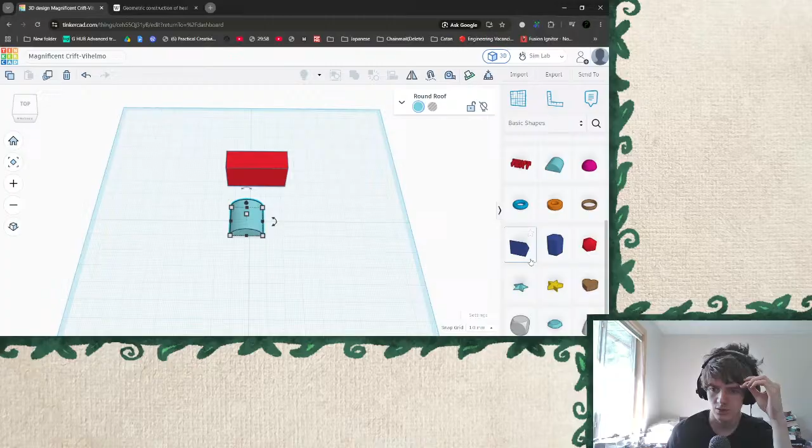Oh yeah, that's a cylinder, obviously. Okay. I want to center it there, which I think is a thing that you can do if I select both of them and then align. Not quite. Nope, nope.

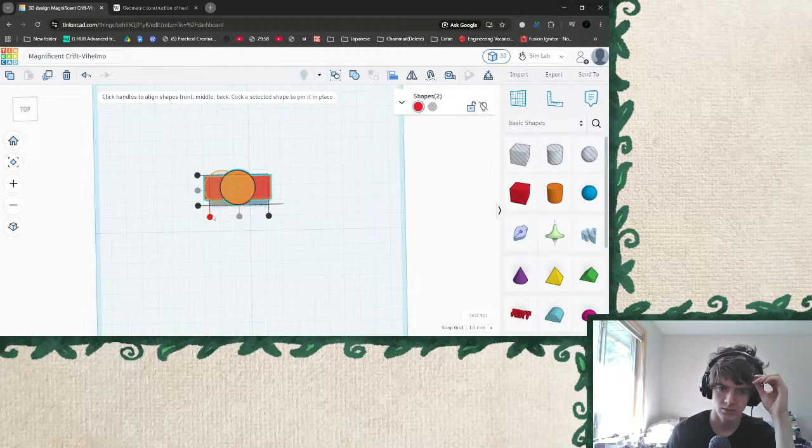Nope, okay, I want like, you know what I could do if I delete that? If I take this one and rotate it this way by 90 degrees, and then this way by 90 degrees. That's caps lock, there we go.

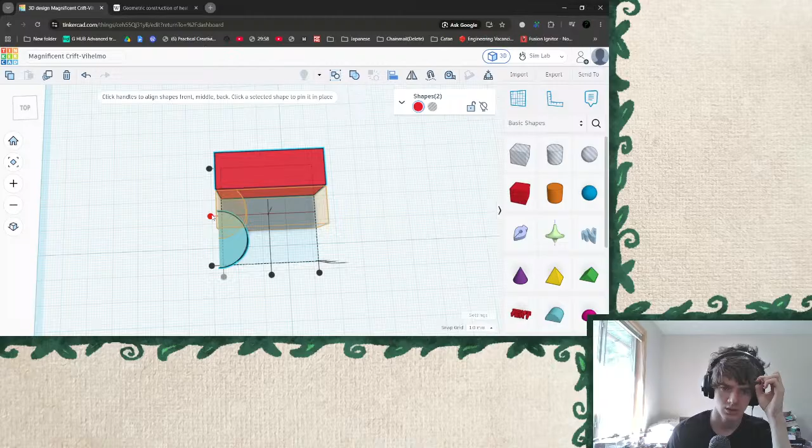Okay, now I should be able to at least left... oh no, that's mirroring. Should be able to at least left align them. And that's accurate. I'd kind of like this to be split in half again, though, so that I can corner... that works.

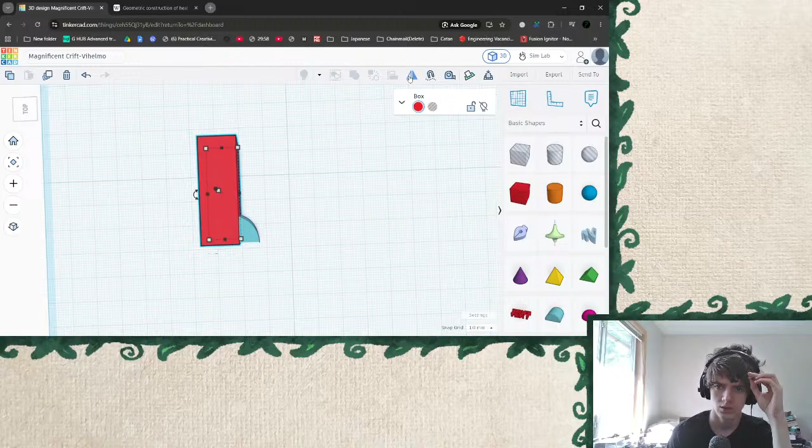Kinda. How wide is this? This is... where do I get the deets? Fit view to selected, home view, mirror, cruise, I don't know what that means, measure. How far from there to there? 13. Okay, so I want the U to be 16.

Did I math that right? I don't know, right now it's 20. Oh well, you know, that'd do it too. Shift to, there we go. So 32, maybe.

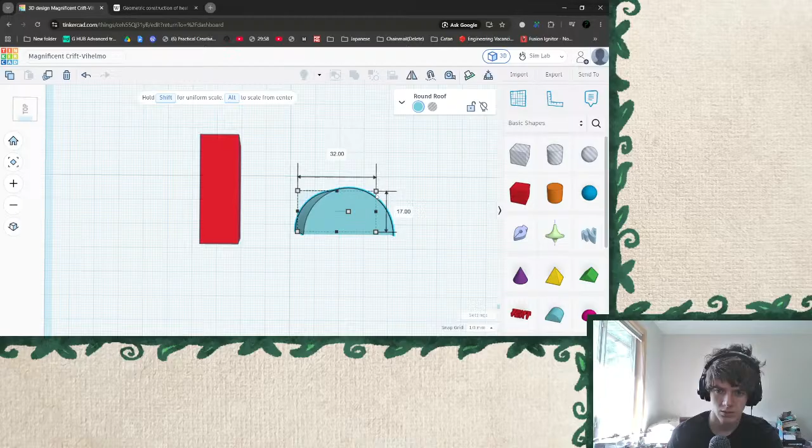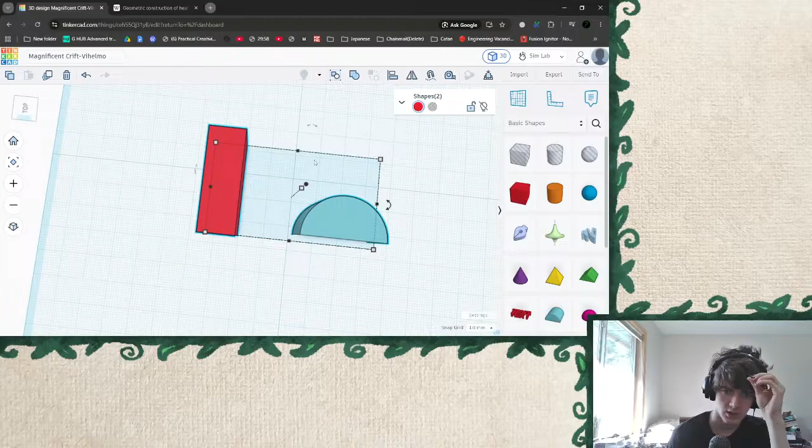Okay, no clue if that worked, it's gonna be jank but it'll be fine. How tall are we looking for? 20. So, 20, nice. Okay, now theoretically, if I select both of them and I align, that's mirror, I align to the bottom and then to the left.

That's not right. 13, 26, 32. Wow, okay, I'm not mathing right. 13, 26. So I need this to be 26. And a half. Just 26, 26 and a half.

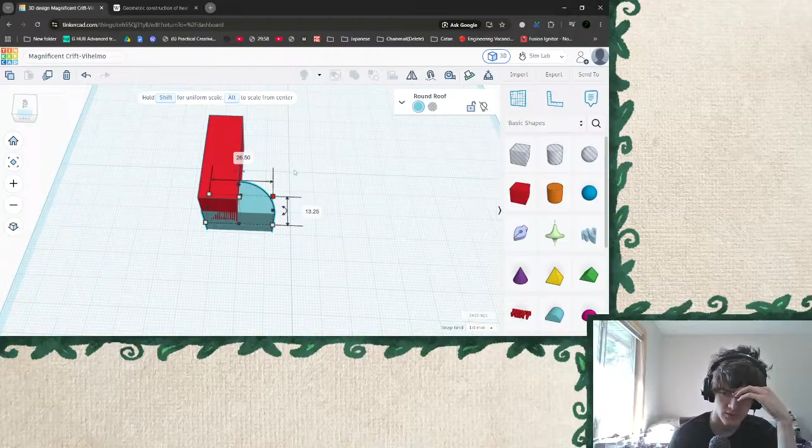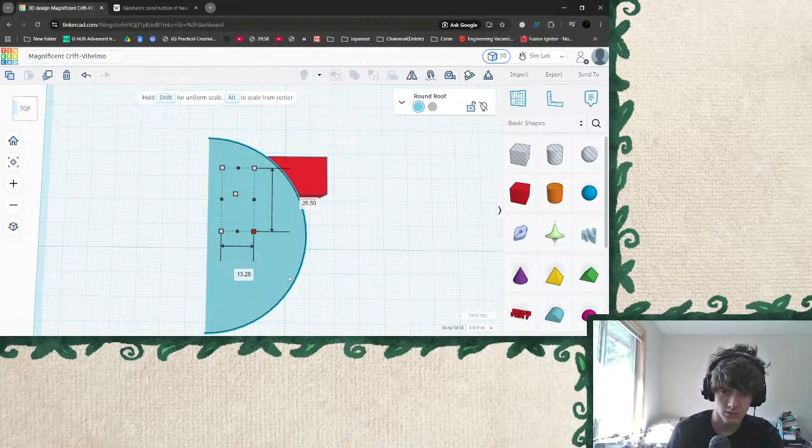26 and a half, that'll do, that'll do. And then height, I want to be 20. Okay. Now we just need to scale it this way until the width is equal to the width of this bad boy. 38. 25. We're going big.

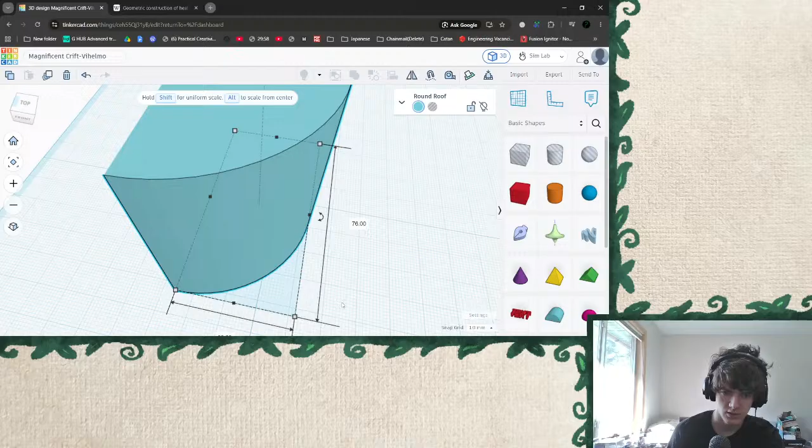Thirty-six. 37. A little more. 38. Nice. I really hope I'm mathing this right. This is getting ridiculous. Right? No. Yes? Oh, gosh.

Oh man, this is getting weird. Let's see, I need you to be shortified. I need to shorten you. 20. Okay, and then I need to move it up until we hit there.

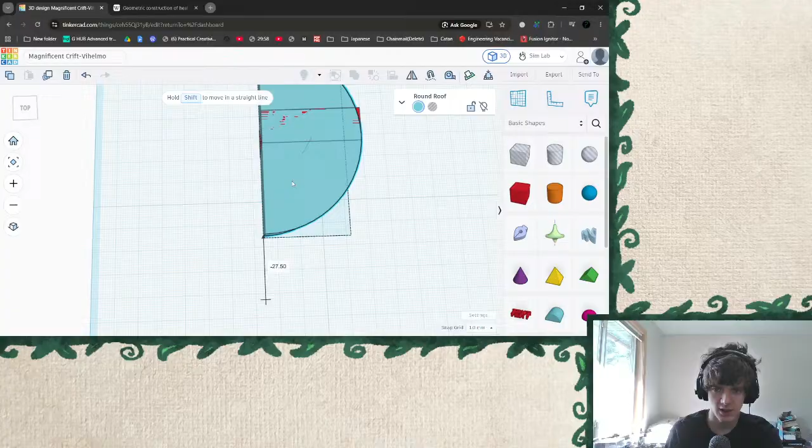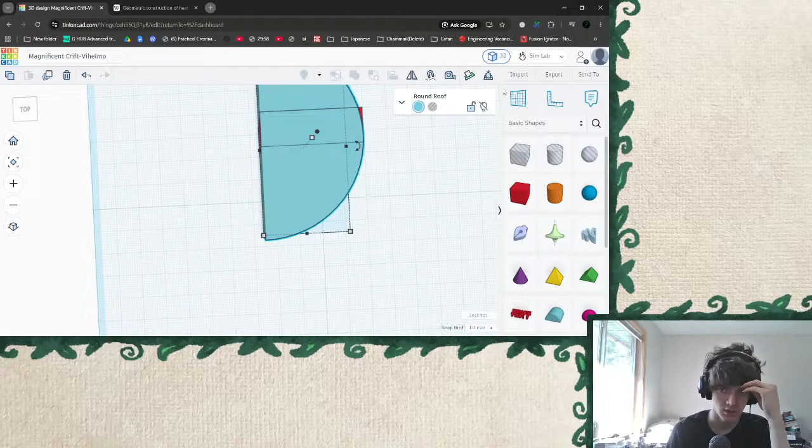Okay, alright, we're making some progress. Obviously, can't you tell? It looks like a shield now. Totally. But we're actually really close, because now if I duplicate this, if that's even physically possible... duplicate, and then mirror on this axis. That's our shield shape.

This little- I want this to be flatter. I want it to almost be like a square, right? So...

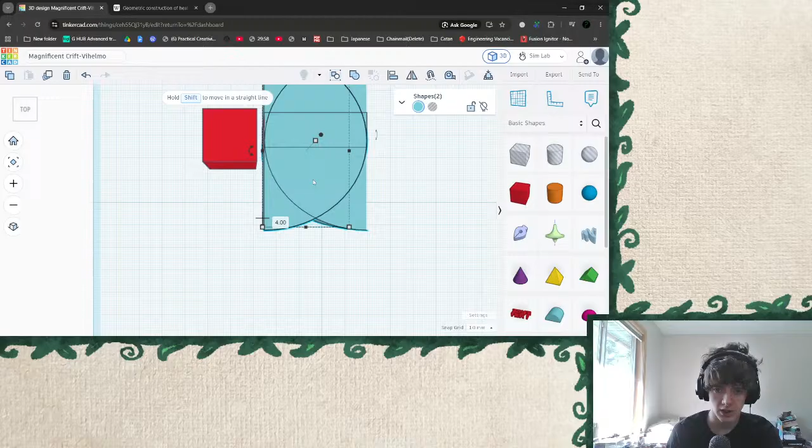That one and that one. And then shorten, squatify them a bit, and then pull that out. That doesn't look half bad. And then like if I cut the bottom, maybe like that.

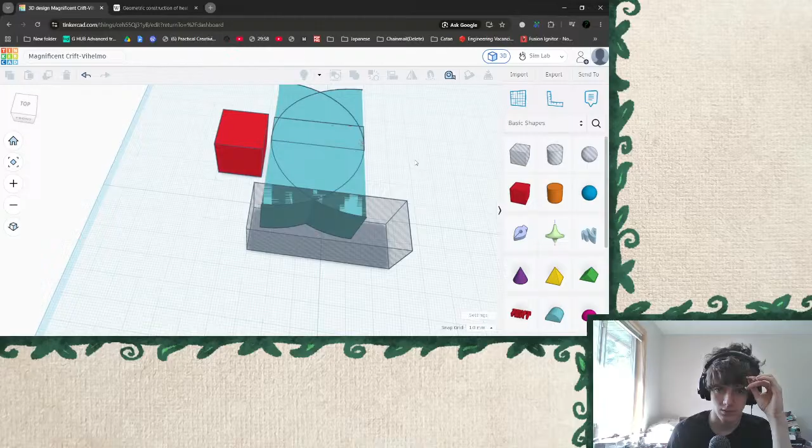So, by group. Nope, nope, nope, nope, nope. Nah. Duplicate. And then merge these two, and then merge these two.

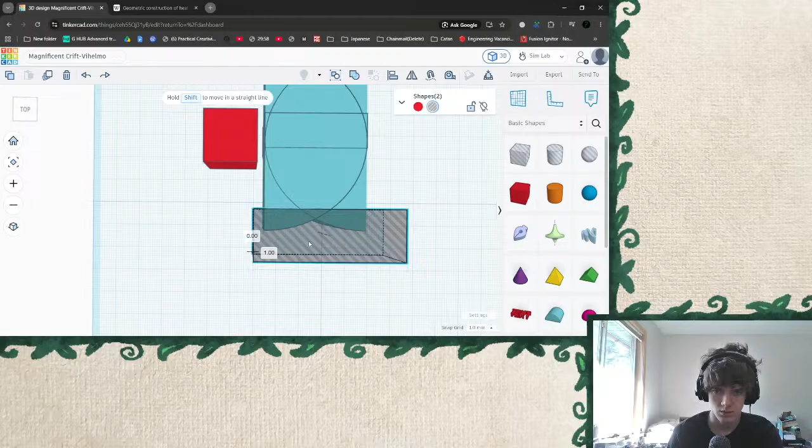It's a bit short. That might be good. Nope. Merge. Merge. That's kind of getting there. That's getting to be the shield shape.

Now, how do I merge these, but only where they're intersecting? Bundle group. Union group. Ungroup.

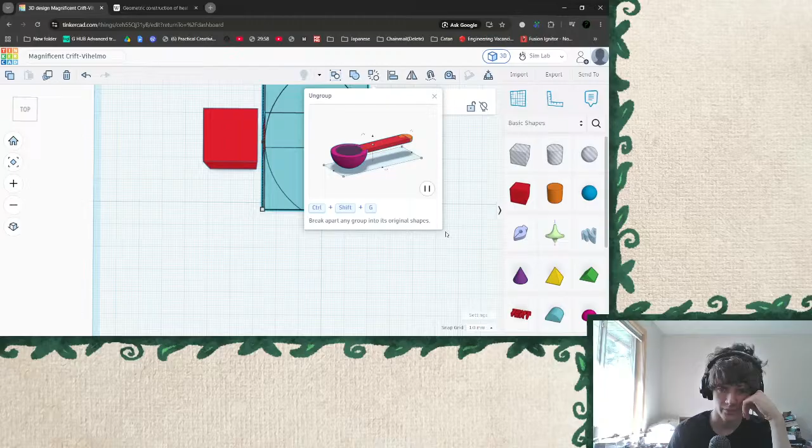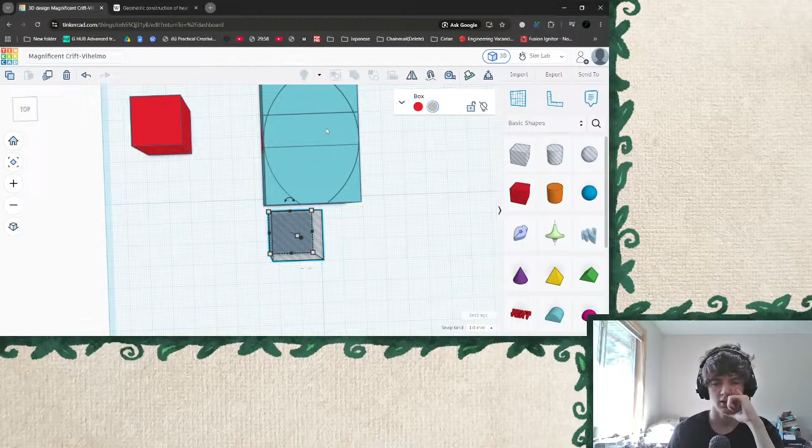How do I cut just this shape out now? Oh, I know. If we take this, right, stick it in here. The width of this is 38, so if we make this half, 14. And then align it to this one.

Let's go ahead and just group these for the moment, so that they all move together when I align it, and then align it in this bottom left corner. Did I do my math wrong again? What's happening?

14, 38. Oh yeah, I'm doing my math wrong. 19. It's like, why isn't that even?

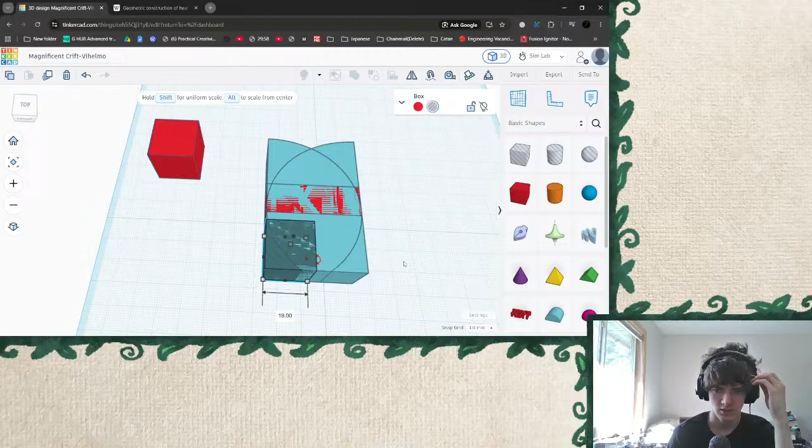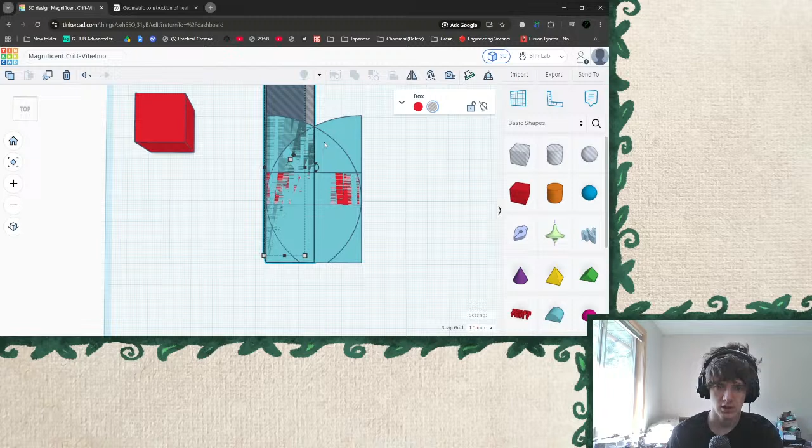Okay, now what we can do is I'm going to unbundle group those. I'm going to duplicate this because I want two of them. So for this arc, I only want this half of it. So I'm going to select this and this and group them together to cut off the left half. And now I can do the same thing over here if I bundle group and then align there.

Now I can select this one and this arc and group. Whoops, that's still bundle grouped. Ungroup that, this one, and group. Alright, making progress. Now it's just trimming the top off here, which I can even just eyeball. Done.

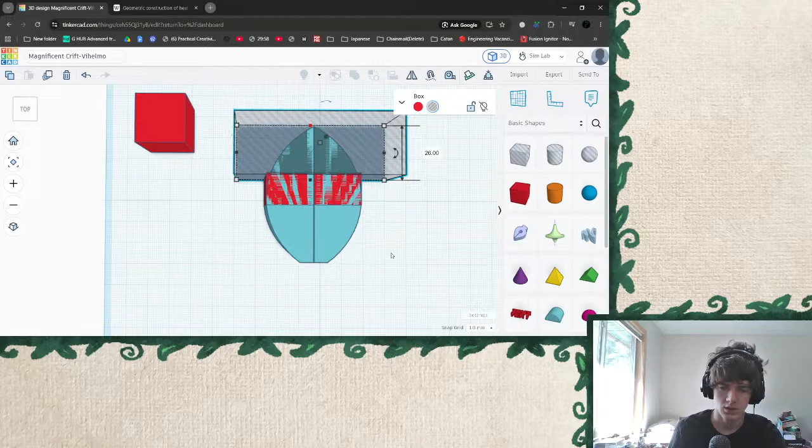And then I wonder if I bundle group this, if I can then just trim both of those at the same time. Yep. And then, oh no, but then if I ungroup, it does that. Okay, so I'll just trim each one of these individually.

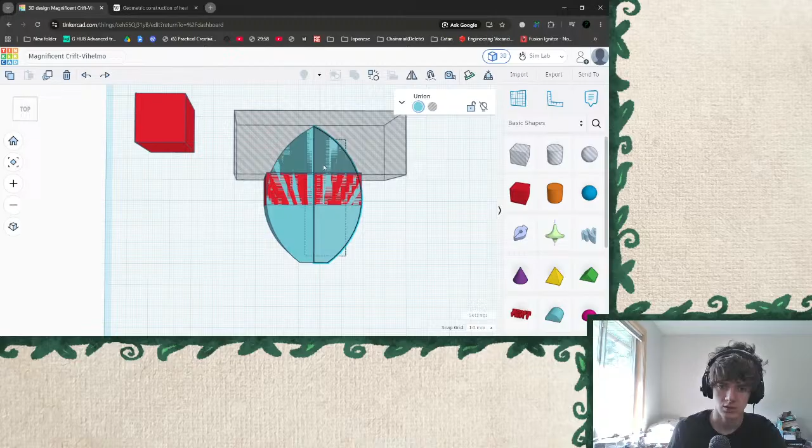Though actually, at this point, these can be merged. So I can merge all three of these together. Now we're talking, that's pretty shield-looking.

If I take, figure out what color this is, and then make this one the same color, merge them all together. I mean, it kind of looks like a pen nib right now, but that's pretty much our shape. I think I want this to be a little bit shorter.

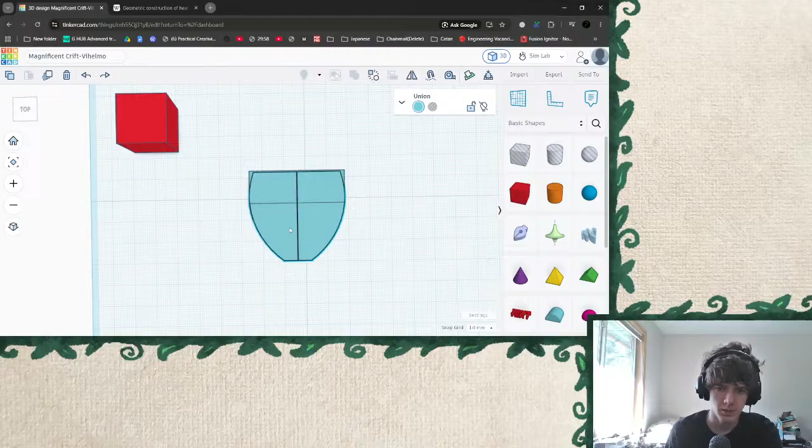Maybe like that. No, that looks too short. Maybe I take both of the- whoa. Maybe I shorten this one here. Okay, you know what, how wide are we talking right now?

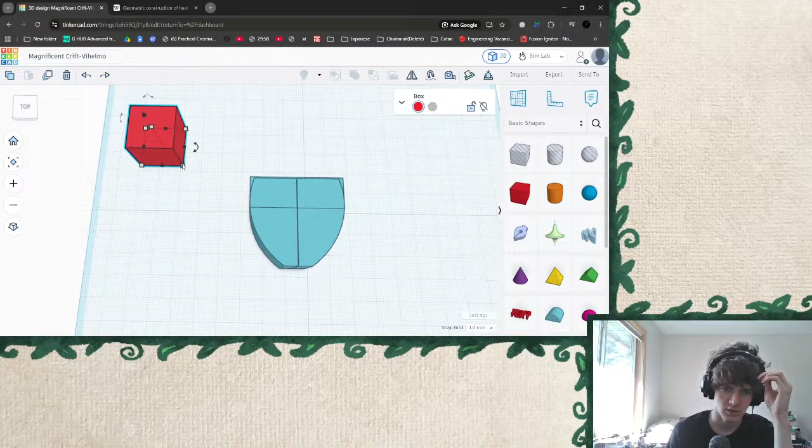38. Okay, to make sure it's an exact cube, let's scale this bad boy to 38 by 38. Bundle group. And align these

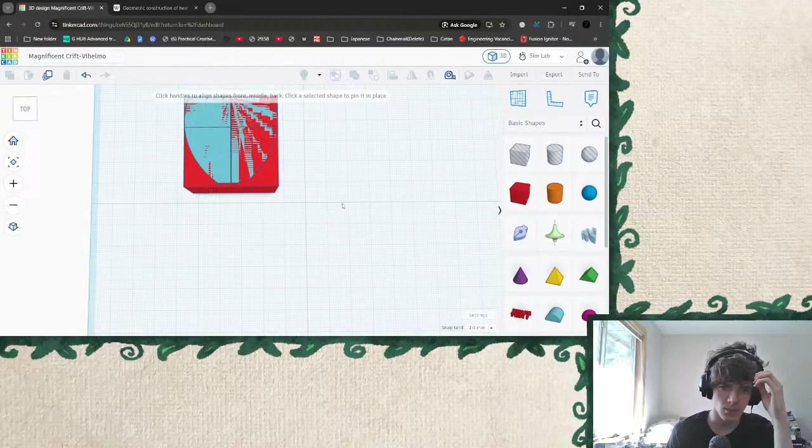Like that. Oh wow, it's actually a bit short, apparently. I think, let's align those again. Top left. Oh, whoa. Yeah, okay, so it actually needs to be taller. Counterintuitively, I would have thought it would have needed to be shorter.

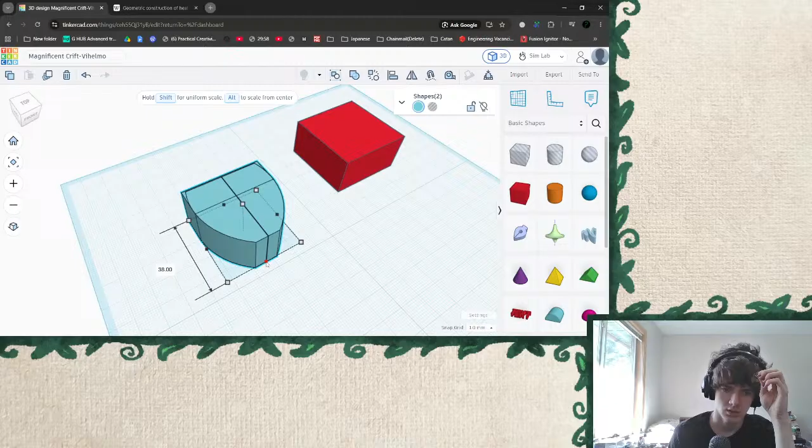So I guess we can just also tell that by clicking on this and seeing how wide it is. Yeah, 36.5. If I just merge all this together- nope, no. Merge these together, and then make this 38. Does that look half bad? Actually, it looks good, I like that.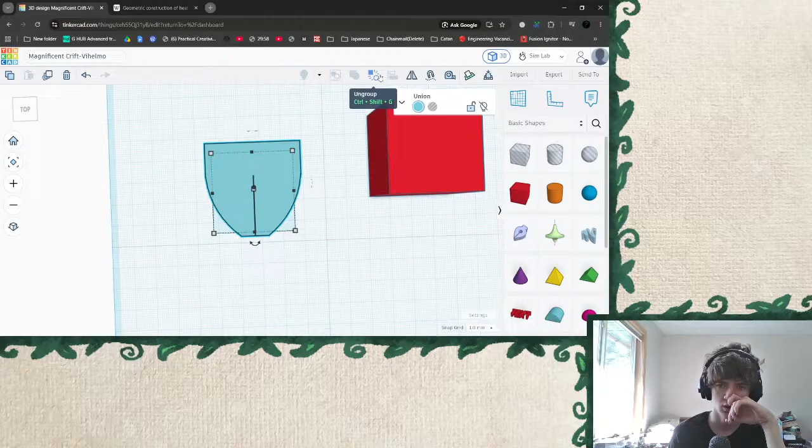Looks pretty good. Maybe a bit squatter, like if I ungroup and select this, and squatify it a bit. And then I bring this down a bit to match.

I think squatify this even more. Yeah, there. And then, how's that? That's getting there, that might be it. A little bit less squat. I'm not sure why my brain's telling me that, but a little bit less squat.

And then that. One tick squatter. Looks really tall. I don't want it to look tall, I want it to look square. And like technically it is square, but right now it looks tall.

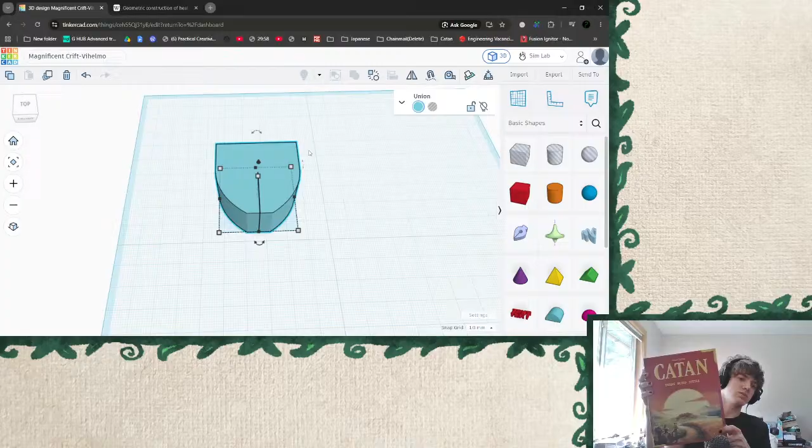Cool, how big do we want it to be? That's the question now. I've got some board games over here, I've got Catan and I've got Yahtzee. The purpose being so I can see how big the dice are, and relative to that, I think I should be able to get a good idea for how big I want these tokens to be.

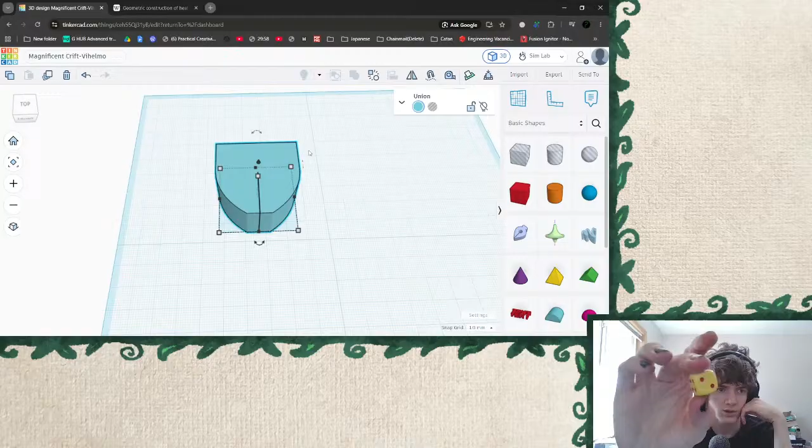This is one of the Catan dice. It feels good and easy to pick up. But like 10 of these put on top of each other might be too much space. Let's see.

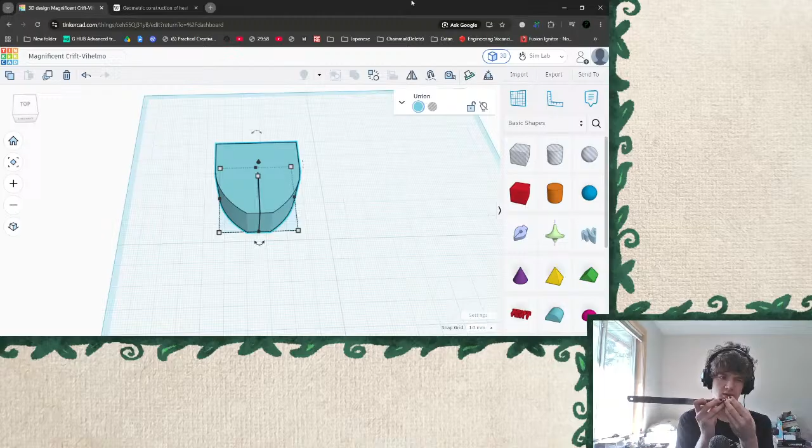Ruler. So these are just about 5/8 inches. So if I want a gap between them of like, wait, no, an 1/8 of an inch. So if they are 5/8 inch, and I want a gap of an 1/8 of an inch, then that would be, okay hold on, how many 1/8 of inches do we want?

So 5 times 10, plus the spacers in between, because there's going to be one token and then a gap between the next one so that it's not one continuous space. You pick this up and put it in the next slot and the next slot and the next slot. So for the gap I'm thinking 1/8 of an inch, and if there are 10 slots, that's 11 gaps I'm pretty sure. So plus 11 times 5, or plus 11 rather.

So 61/8 of an inch, 7.625 inches tall I think, if I'm doing my math right, which probably not. 7.625, which I believe 625 is like 5/8. Yeah, so 7 and 5/8 inches. That's not actually that bad.

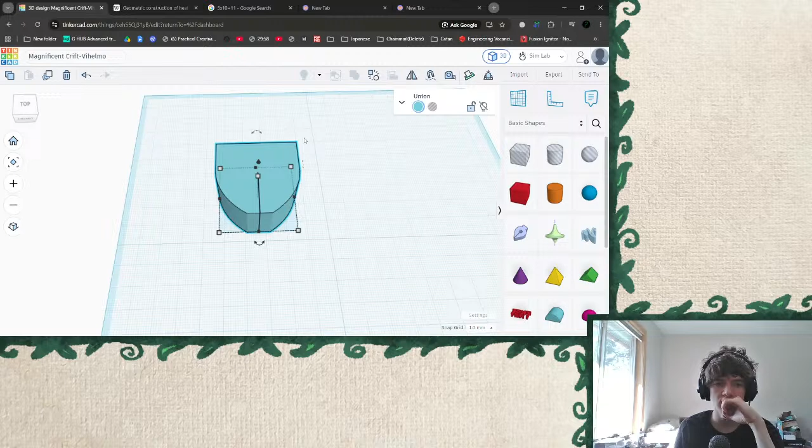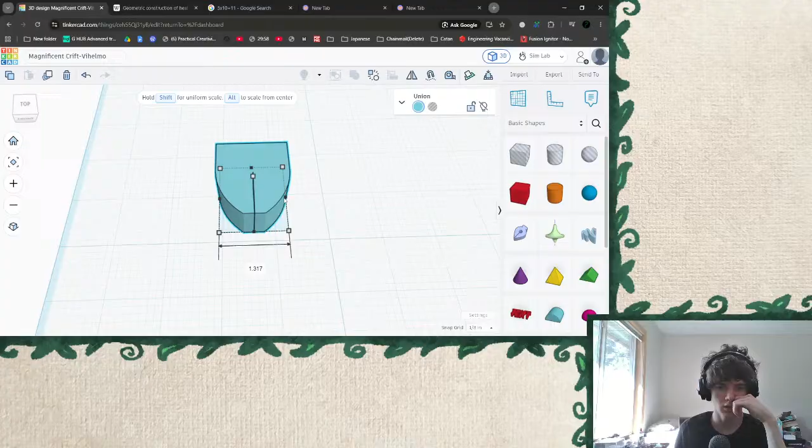We need to make the grid settings different. Imperial 1 to 1 inches. That's actually really close, but we'll make it 10 inches by 10 inches just to give ourselves some more workspace. Okay, now width, I want to make 5/8 inches, 0.625. And then squatify, 65. All right, that's actually really cute looking, I really like that. Okay, height is a later problem.

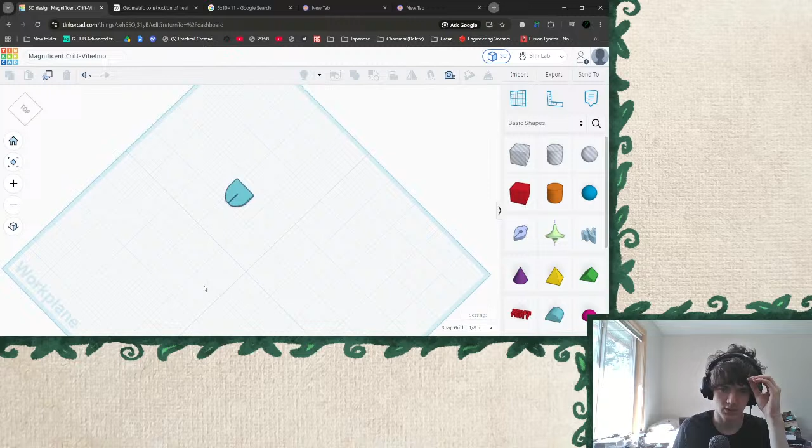We'll let it be the little skyscraper that it is for now. Actually, I'll shrink it down to a temporary height. I mean I could probably actually just make it a cube. I'll make it a cube for now. Okay, awesome, sure doesn't look like a cube, but it technically is. Should be, if I did my math right, which I probably didn't.

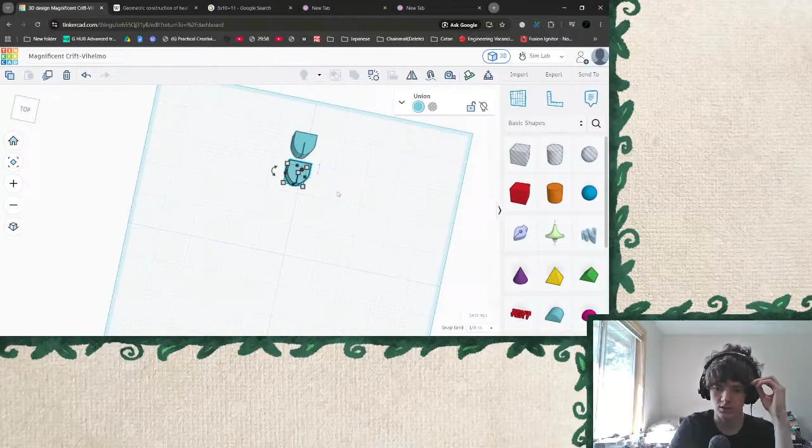Anyways, all right, now we need an army of these, so duplicate. I'm really hoping that this little pen nib bit doesn't show up when I actually go to 3D print it. Let's make sure it doesn't. Save it to desktop as test.stl. Need to rename this to Glyph board.

Okay, now I'm gonna open up, sorry let me get that back up for you. Whoa, whoa, whoa, okay yep, whoops, that closed out everything. I guess that's just gonna have to be how it is for the moment.

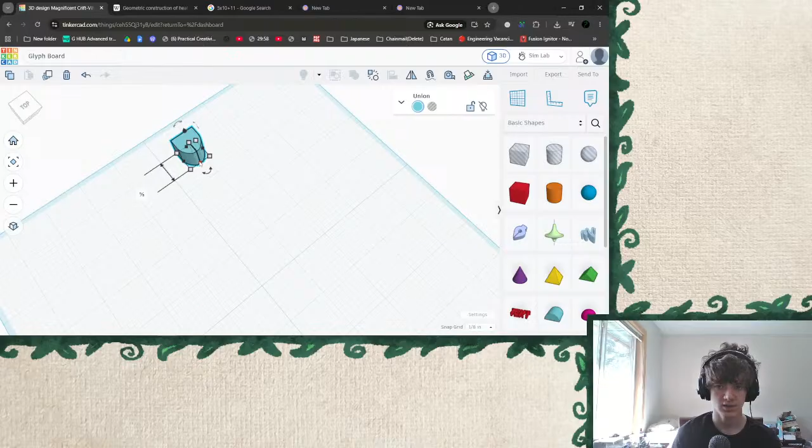So I want to duplicate, and then move it down 5/8, 6/8 of an inch down. Actually, what I'll do is take this one and snap it - oh, it actually shows you. Never mind. 6/8 of an inch down, please. 0.75 inches down, please.

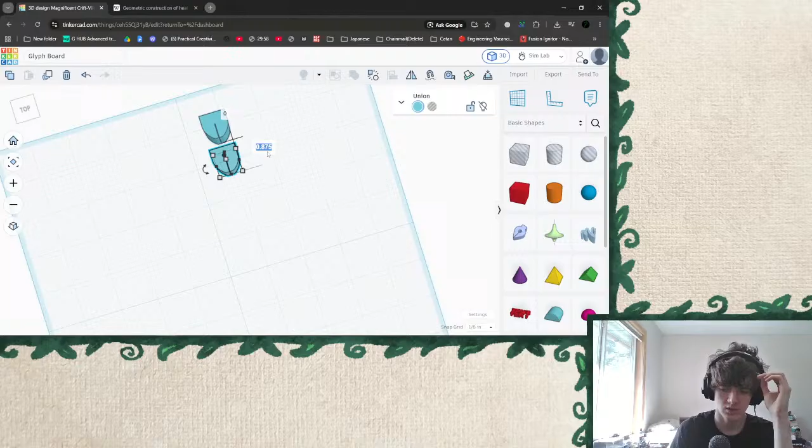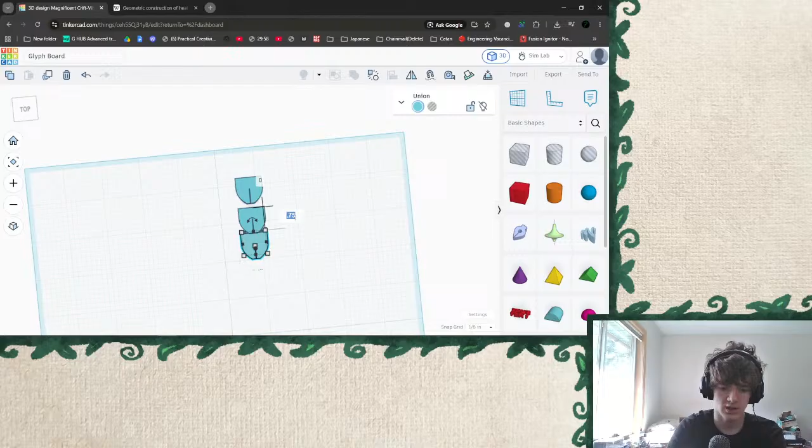Okay, so that's what we'll be looking at with the gaps. Hopefully that's not too thin, 1/8 of an inch - that shouldn't be too thin, I don't think. Okay, bop, and move down - oh no, duplicate. Now we move down, 0.75 inches or whatever. How far are we moving it down? The math here is just going to get a bit much, so let's just duplicate and keep moving by 0.75 inches. Copy that. Duplicate - oh sick, it just repeats it. Okay, 1, 2, 3, 4, 5, 6, 7, 8, 9, 10.

Cool, and then if we select all of it, duplicate, and then move it to the right the same amount, 0.75.

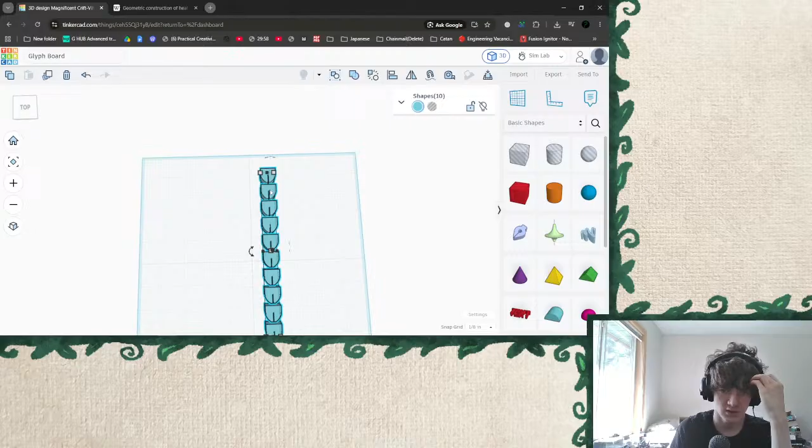There we have it. All right, so that is... I'll show this bit. That should be that part done. Looks like it. Sweet. Okay.

Now, so this is going to be the height of the board, essentially, I think, unless I also put the... no, yeah, that's the health bars to the bottom. So that's going to be the height of the board. That's determined. So let's make a cube.

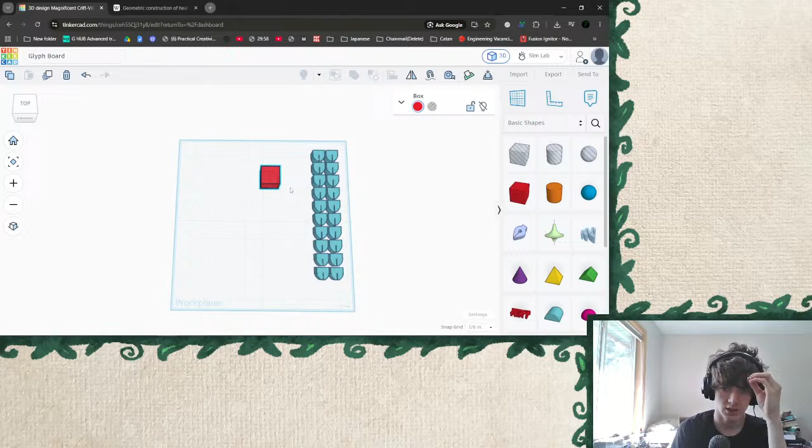This can be the board, and we'll make it, just say, 1/2 inch. 1/8 of an inch. Figure this out later, but basically a flat plane, 1/4 of an inch. That'll do. Center it to the corner is where I want it to be.

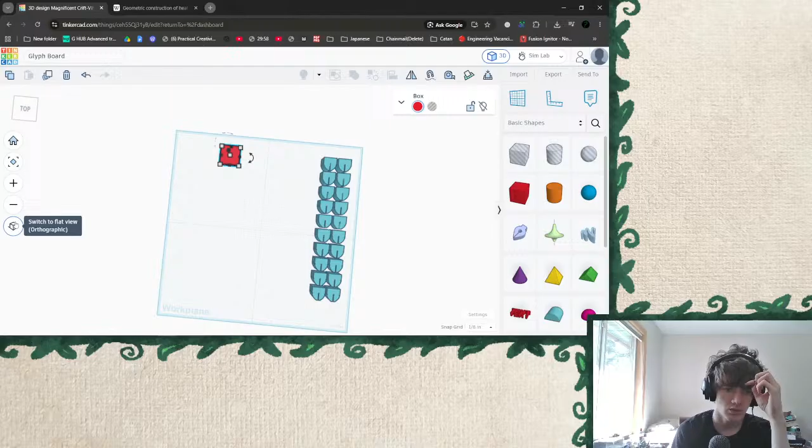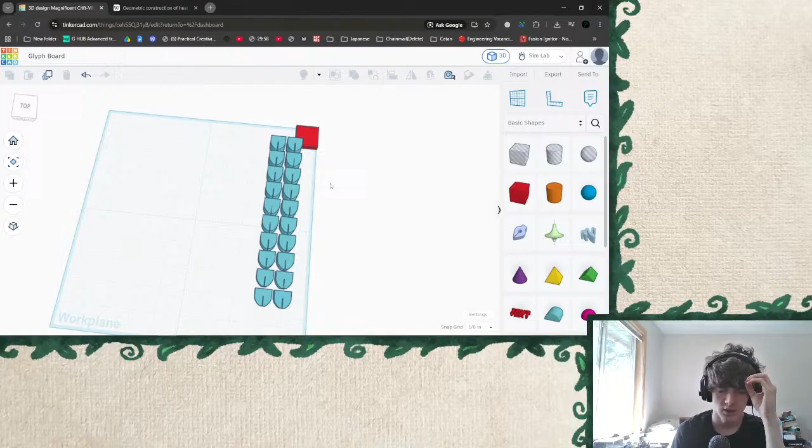Next up is I now want to move. I'm going to take all these and group them together, not that one. That way I can also stick them in there, in that corner. There we go. But these I want to be, again, 1/8 of an inch, that way and that way.

Okay, and now this, I want to be 1/8 of an inch taller than however long this is. So this is currently, undo, 7 3/8 inch. So this needs to be 7 5/8 inch, because 1/8 of an inch for the top, 1/8 of an inch for the bottom. So 7 5/8 inch, please. A bit less. There we go. Cool. All right.

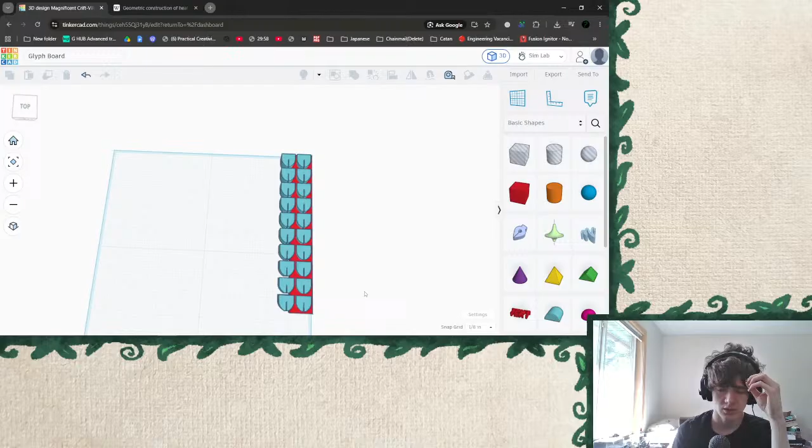So that's the height of the board figured out. We're gonna have one heck of a board, it looks like. Next up, health bar. So I'm gonna just keep the same dimensions of this, of 5/8 by 5/8, and we're going to make a cube. I'm gonna change this color to be duller.

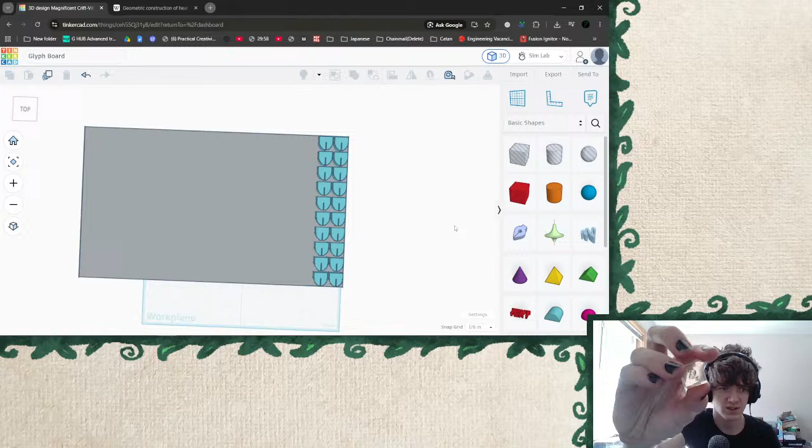The idea for the cubes, for the health bar, is it'll be a D6, like I said. I'll use one of these. This was actually a test piece when I was resin casting dice. This is a perfectly, or as clear as I can make it, D6 that can be quite hard to read. I made a set of them for a white elephant gift with my friends, a set of them excluding the D10s. I don't think I got those. I didn't make enough resin.

Oh well. Okay, so what it'll be is like, no, clear's not working with that. Let's grab the Catan dice. Okay, so on this side, it'll be... I need another thing to demonstrate this. Let's pop into my drive. Nope. Tokens.

All right, so over here is the health bar. So this is what the health bar will look like when it's filled, and this is what it will look like when it is empty. So you'll be at like 9 health, you're at 10 health. If you take 1 damage, then you go down to 9 health, and the 10 would become grayed. And then 9 would become grayed, 8 would become grayed. It's kind of how it's going.

So what the D6s are going to be is on this side, it'll be red and white. And you'll take the die off the board, rotate it 90 degrees, and then this side will be the grayed out, and you put it back in. Take it out, flip it, this side will be red, put it back in, take it out, flip it, this side will be gray, put it back in. That's the idea for how these will work. So alternating sides between red and white and gray and black.

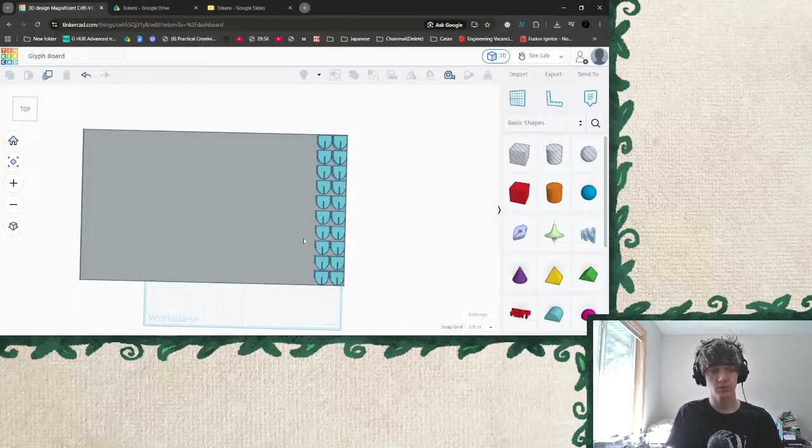You would move this up - you'd take this token and slide it up into each slot. The left is the tens place, the right is the ones place. This should hopefully be a bit easier. Instead, all of these are going to be indents in the board, and you'll just have two tokens you pick up and move to the next slot. That's the thought.

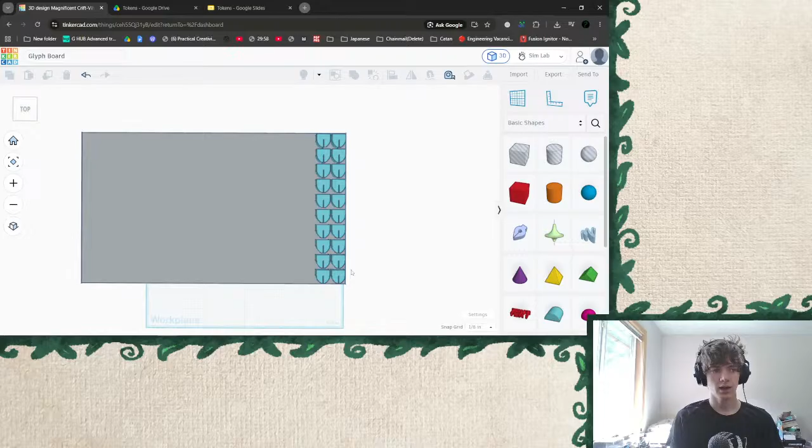I haven't taken into account tolerances. These are actually going to need to be shrunk a little bit when we go to print them, which I think works well. It feels a bit chunky to me, the pieces right now - a bit big.

Right? Maybe not, maybe so. No, actually I want them to be that size. Okay, shoot. That opens up a whole other can of worms. But I guess there needs to be some gap around the token so it's not an infinitely tight fit to put the token in. But how big of a gap, I do not know.

I don't have any board games that use this style. The Slay the Spire board game is one that I want, and it does. This game was my first introduction to this way of doing it, where it's a piece of cardboard with an indent, and you put things in the indent, right?

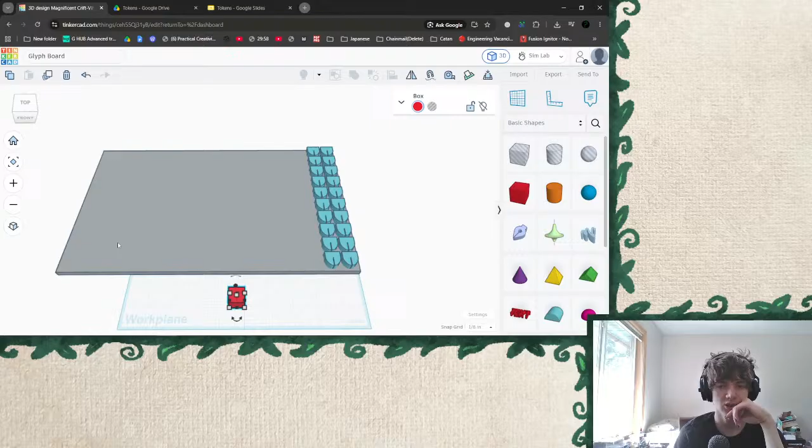Though in actuality, I want to round these corners, but I'm not sure if that's possible - if I can actually bevel the edges in this. Aha, what are steps? Turn that up to 20, turn down to 0, maybe it's like fidelity. Length, width, height, radius - oh, now we're talking. Sick.

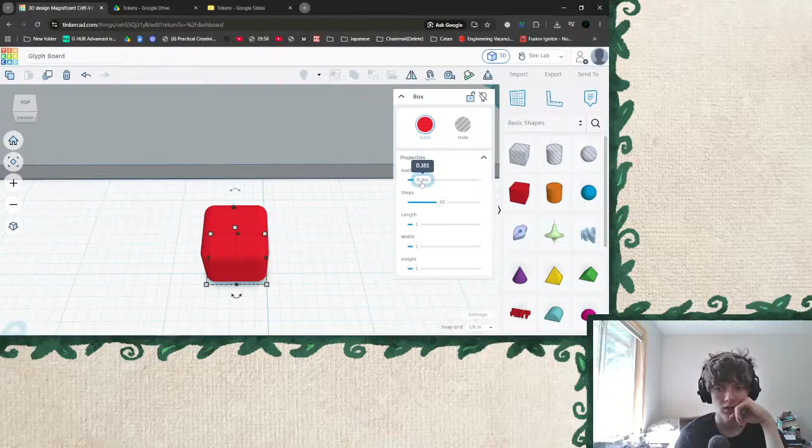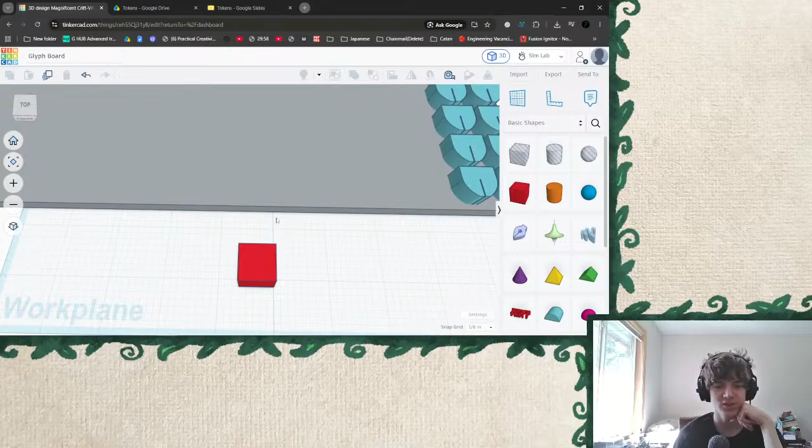Oh, but I'm going to be 3D printing it, and bevels don't work too well in 3D printing, at least vertical, because it's like layers - so it ends up looking like the layer lines don't necessarily work all that well. So, sharp-edged corners it's going to be. Well, that was easy, cube designed. Mission successful, heck yeah.

Let's see - oh, unintentionally colored that red. Perfect, that's supposed to be red. We need space on the left here for numbers. I think what I'm going to do is just make it the same size as those guys. So I'm going to duplicate, make another one of these, and just color it darker gray.

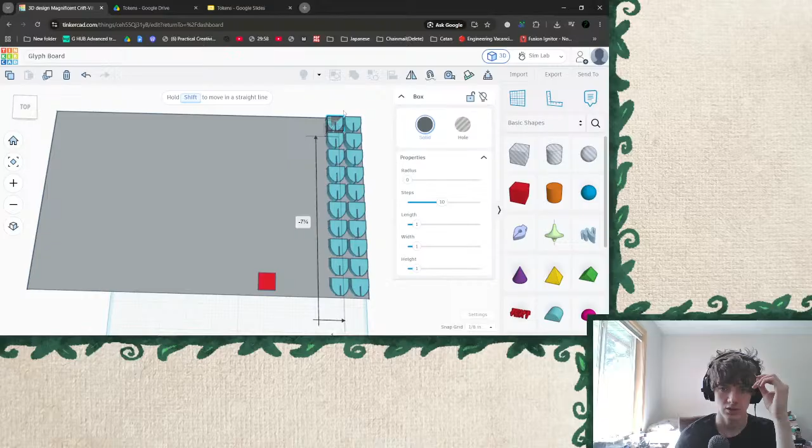So I think what I'll do is give the numbers the same spacing as the cube. So - no, I was so close. 6/8, 3/4, perfect. All right, so this area will be designated for the numbers.

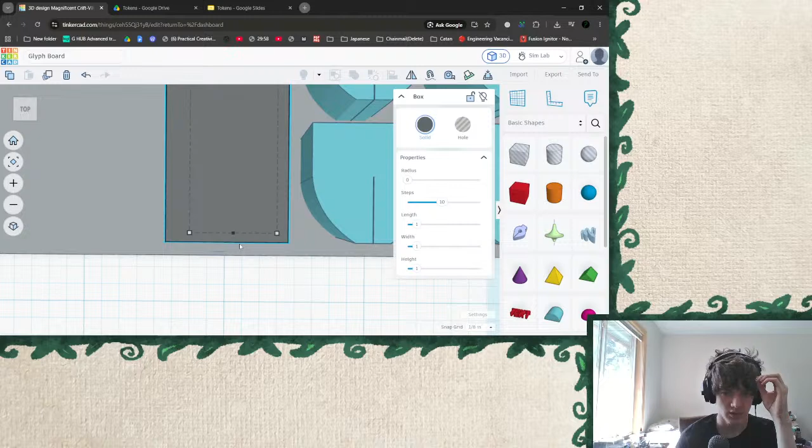If I bring this back up - so the numbers here on the left show like this is the zeros, this is the ones, this is the twos, this is the threes. I'll give that the same amount of space as one of these has. That's actually really handy to be able to just pull up the thing real quick. All right, and then height - let's make you, oh, you're already aligned. Perfect.

Mission accomplished. I still gotta figure out - it might be very funny if I just tape a piece of paper over this area and write the numbers on it. That might be funny. I gotta decide if I want to engrave the numbers or not. Probably not, that sounds like too much effort, and we don't like effort.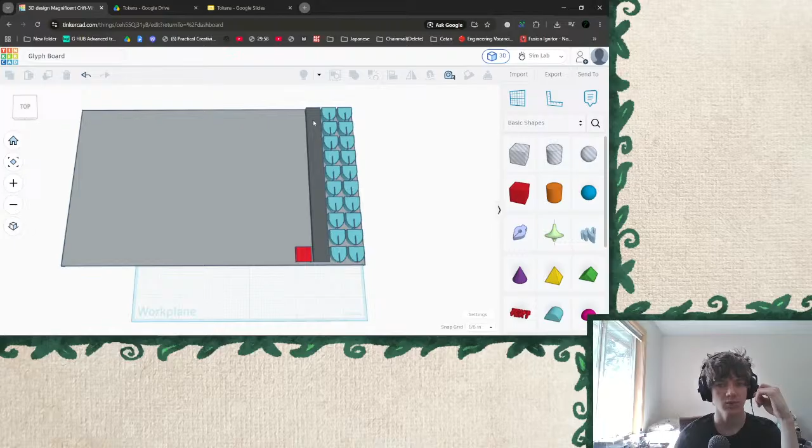All right, 1/8 - perfect, convenient that the snapping distance is 1/8. Okay, now we figure out the width of the board. That's why we're doing health next - this determines the height of the board, this will determine the width of the board. And because this is the most extreme, like 10 pieces, this also led to determining how big these pieces should be so as to not make the board too tall.

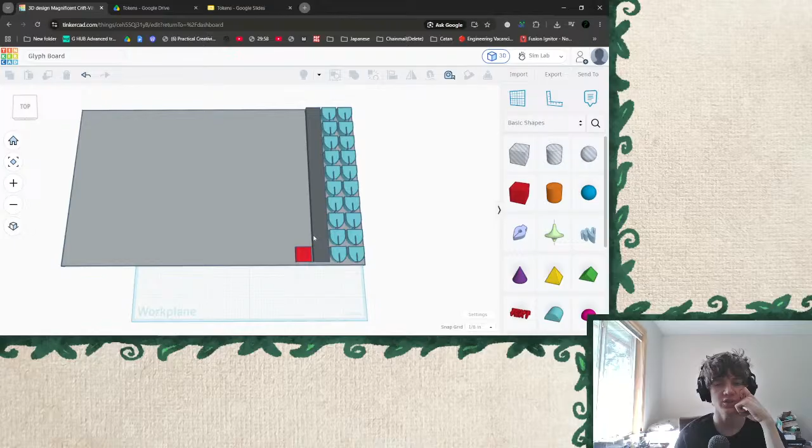Now that we know how big these pieces will be, we can figure out the horizontal. That's why I chose this one first, because I knew it would be the most extreme variable, so it's probably the best one to tackle first.

Duplicate and move, 6/8 or 3/4, then duplicate. 1 through 10. Oh, I guess it's going to be the same as the height, so we're going to have a decently squarish board.

But not quite completely, because it's a couple ticks longer. Whoa, something's not liking that. Oh, I thought it was lagging. No, I just wasn't clicking it. Right, apparently. All right, that needs shortened a little bit more.

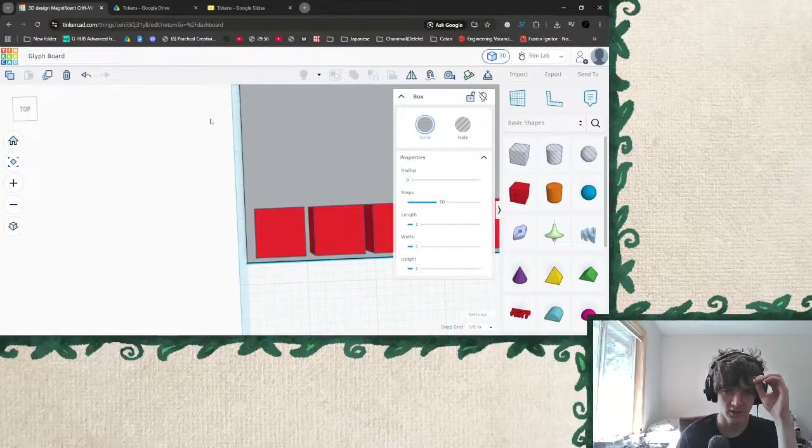One tick, please. Oh, no, okay, never mind, it was fine where it was at. I guess I could have controlled Z. That's okay, alrighty, so we've got ourselves...

Shield bar, health bar, removable area, kind of. Let's make this black. And then our workspace for the removable area. In the case of the players, it won't be removable, but...

Wow, that's very close to 10 inches. That's like 9 and 7/8 inches. That's creepy, all right.

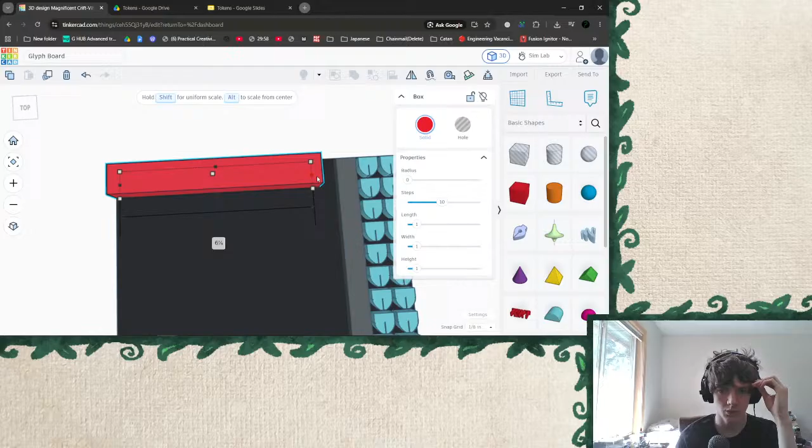And then I'm figuring out where the removable part of the board will be, like the enemies and stuff. So another 1/8 of an inch out from both of these sides is the plan.

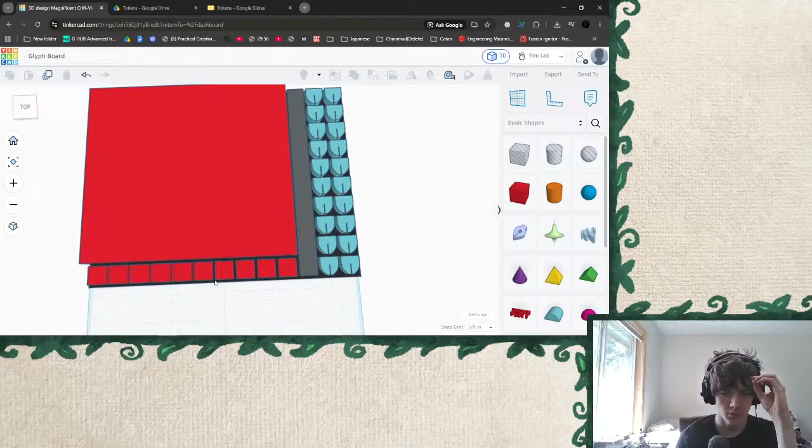Okay, so this will be the removable section of the board. This... that might be too flimsy. I could add an 1/8 of an inch to all the sides, and I think that'll actually make things look better.

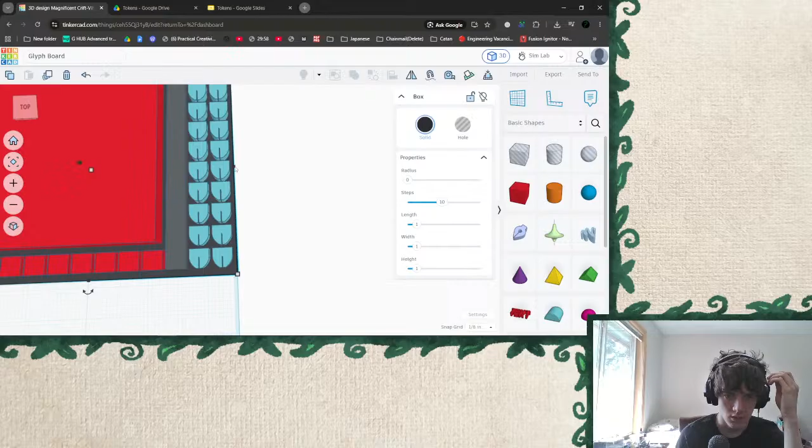Okay, let's add an 1/8 of an inch all around to the full border. So 1/8 of an inch there, 1/8 of an inch there, 1/8 of an inch there, and there, and then 1/8 of an inch over here, and up here, and up here.

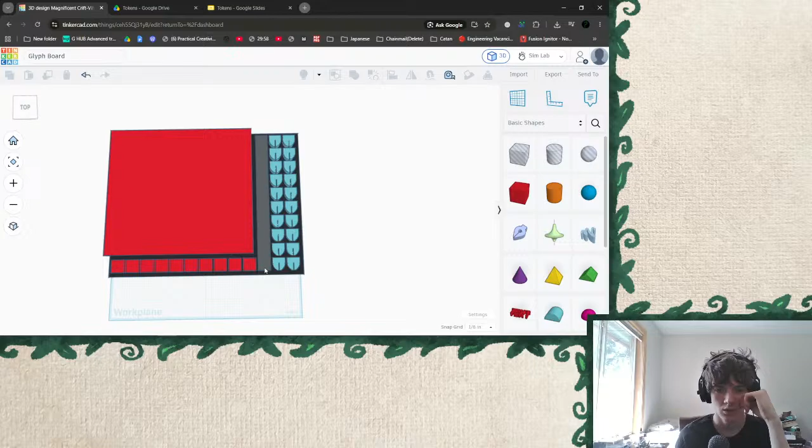Okay, how's that looking? I like that a lot better. This feels a bit weird though. I'm gonna move all of these over an 1/8 of an inch to give more gap between the shields area and the healths area. See what we think about that.

And then this would extend by an 1/8 of an inch. This would extend by an 1/8 of an inch. Okay, that looks versus... yeah, I like that better.

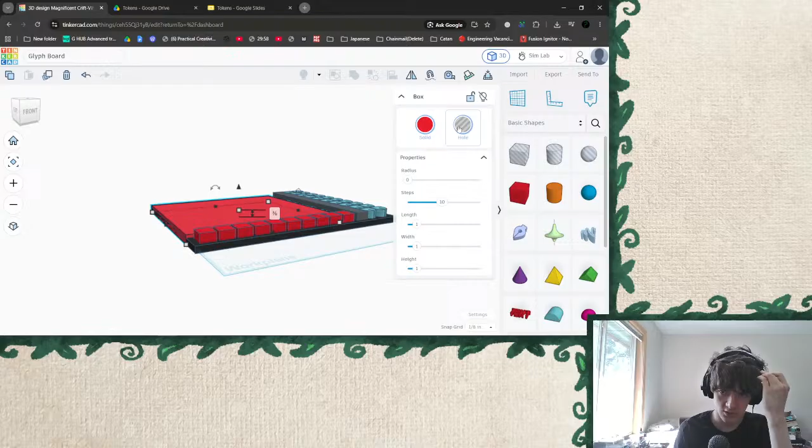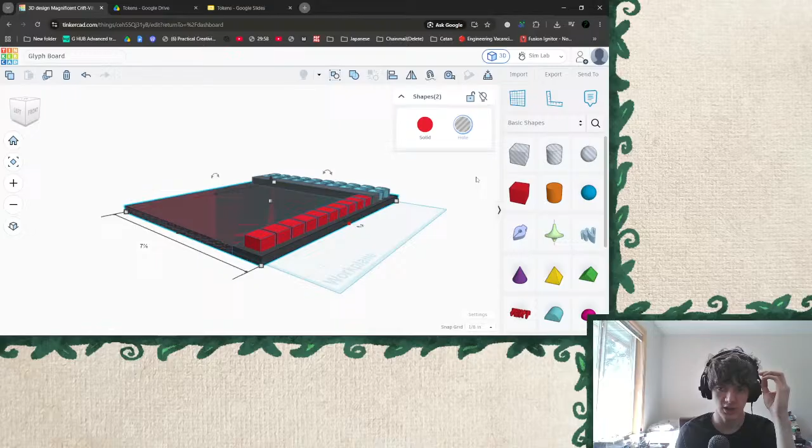Cool, all right, and now this we can shrink down to be just a little bit taller, just so we can see the color difference. I guess what we can do is put it like that, duplicate, make this one a hole so that when you merge this type of thing, the striped dudes, with a solid object, it actually cuts it. There we go, so now we cut the shape out.

So this will be our border, and then this will be the play area where you can put like cards and stuff. This will be this area. So it looks like we're going to be a lot more square than I was expecting, but that should work fine.

There's 2 blank spaces. I was thinking originally of doing 2 more components, but I decided against it, so those are going to get ixnayed. Health bar, shield — yeah, components will be next, but...

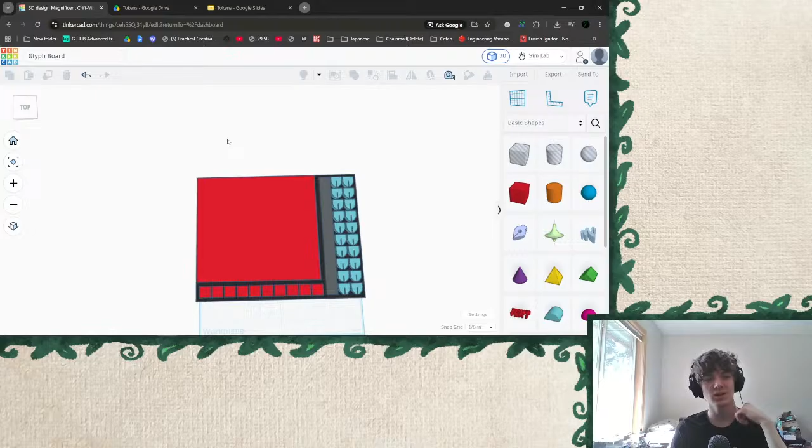I think that's where I'm going to call it for today. I'm really happy with the progress, this is going to be so dope. The current prototype right now, all this is printed on cardstock paper and then cut out, so it's an absolute pain to work with. Flipping over these little tiny token things made of cardstock is not fun, so I'm really hyped about getting to work on a new board design. It's gonna be so much fun.